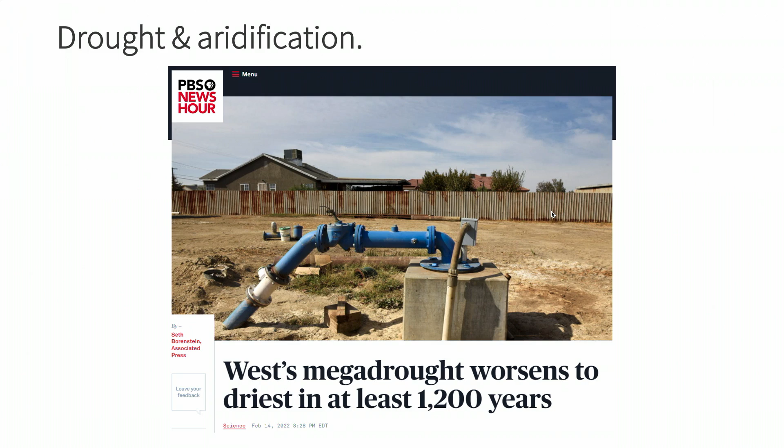This pretty severe period of drought is really exacerbating water levels throughout the Colorado River. And many of our communities in Colorado rely on Colorado River water, and we're seeing greater and greater tiers of cuts being issued by the Bureau of Reclamation as our reservoirs are shrinking to 25% of their total capacity.

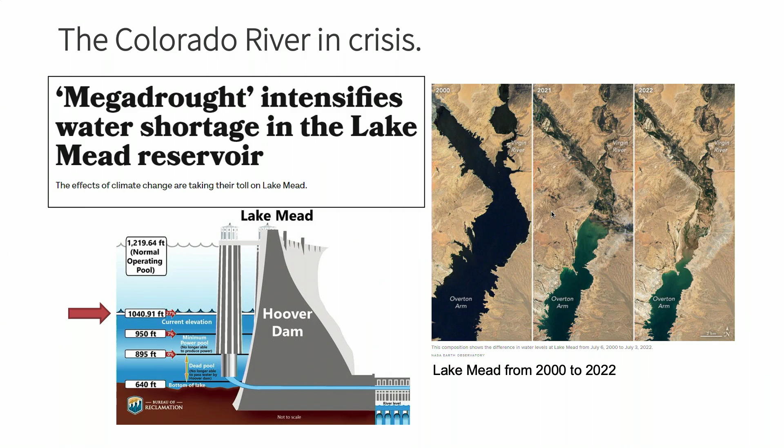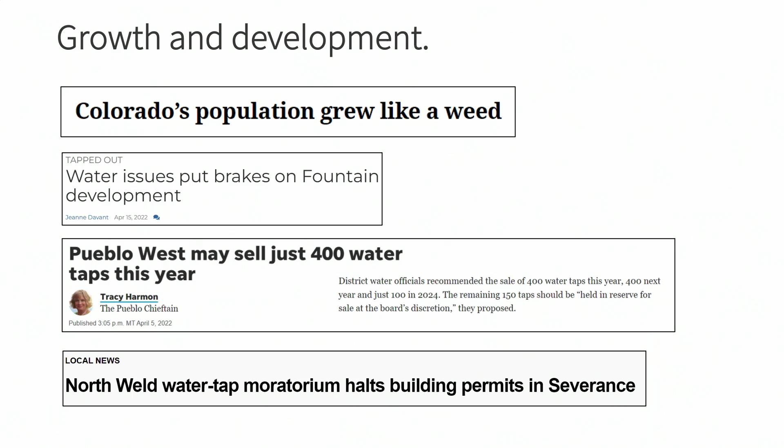At the same time, we are seeing that Colorado and other states in the West are growing. We know that this is creating additional pinches in our communities. We added almost 1 million new residents between 2010 and 2020, and we're projected to grow to 6.5 million people by 2030, which I just checked is less than 8 years from now. So this is happening quickly, and water is playing a major role in the way that our communities are developing.

The Colorado Water Conservation Board also confirmed that based on several different scenarios, we will be seeing a gap between the water supply that our municipalities have and the demand that's projected of between 250,000 up to 750,000 acre feet per year by 2030. So this is a growing gap.

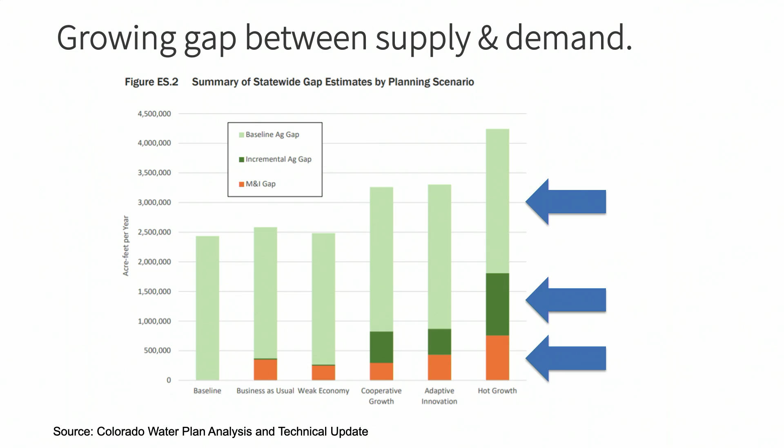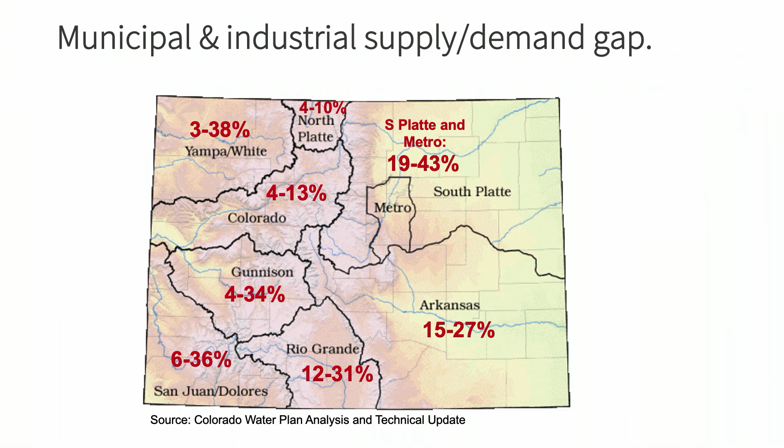And much of our, oh, sorry about these arrows here, much of our impact has to do with how we grow, whether we embrace adaptive approaches to our new development, or we grow with water in mind, or whether we kind of ignore that side of things and continue to move forward as usual. And the gap between water supply and demand projected exists in every basin in Colorado. So it's not a particular issue for a particular place. It's something that all of us as communities have to be considering.

So just quickly, Growing Water Smart is the program that I manage, and we empower local leaders to implement plans and policies that support community and regional water resilience. And the way that we focus our attention is by turning from the supply side of acquiring more water and addressing issues of stormwater by piping it as quickly away from our communities as possible, toward a view of demand side reductions, incorporating conservation, efficiency, and reuse into our developments. And also to really look at low impact development or green infrastructure as ways to work more in concert with nature and to infiltrate our stormwater rather than piping it away.

And we do that by involving many people in these conversations. It's not only the land use planners or the water resource managers, it's not only the developers or the consultants, it's not only the elected officials, but everyone talking with one another and coming up with the strategies and approaches that will make our communities more resilient to existing and future water issues. And our communities will benefit in more ways than one. That impacts cost of water, that impacts resilience to natural hazards like drought, wildfire, flooding, and it enhances our ecosystems to be more resilient in the future.

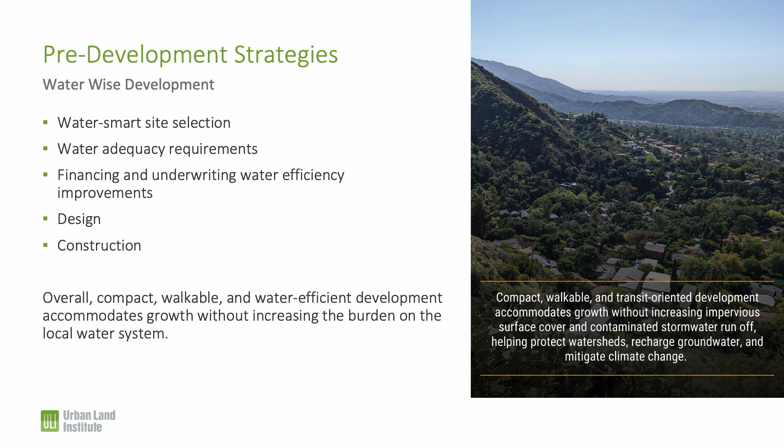Indoor water use in the U.S. has significantly decreased in the last two decades because of the increased efficiency of water fixtures and appliances, but there's still a long way to go. A lot of buildings still have those older fixtures in them. So don't ignore the existing properties. There's quite a bit of ground to make up. That will result in significant savings across development types.

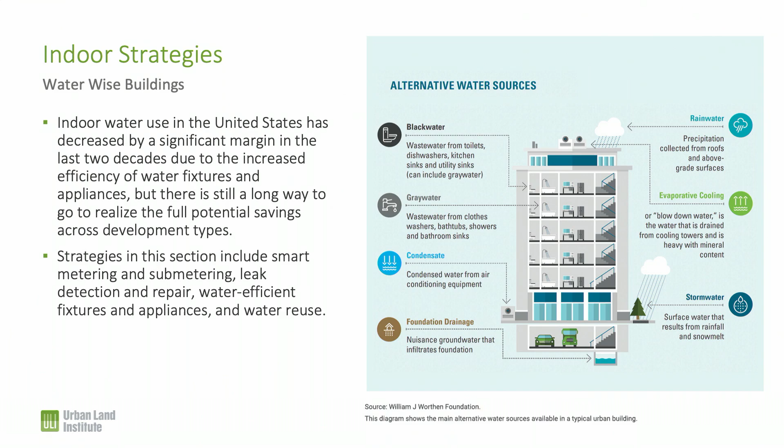Strategies in our indoor strategies section include smart metering and sub-metering, leak detection and repair, water efficient fixtures and appliances, and water reuse. And you can see on this chart that we have different water sources that are usually available in a typical urban building for water reuse. So that's really exciting.

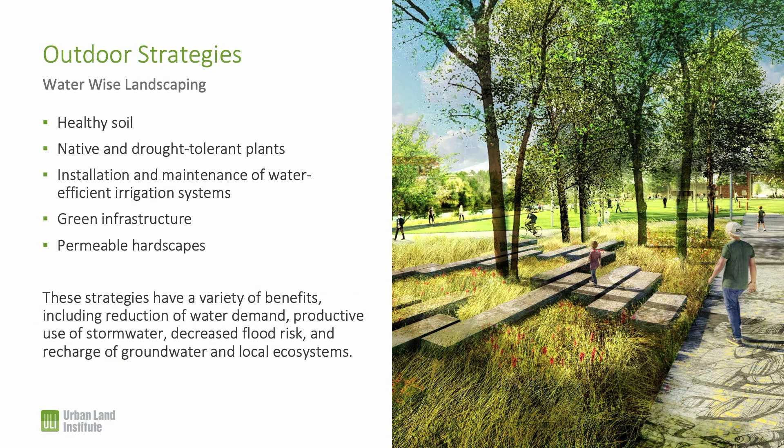Outdoor strategies, Bill will be digging into some of these after I talk, but they include everything from soil preparation to native and drought-tolerant plants, installation and maintenance of water-efficient irrigation systems, green infrastructure, and permeable hardscapes. And these have a variety of benefits, not only reducing water demand, but also productively using stormwater, decreasing flood risk, and recharging groundwater and local ecosystems, which is critical when you're in a drought situation.

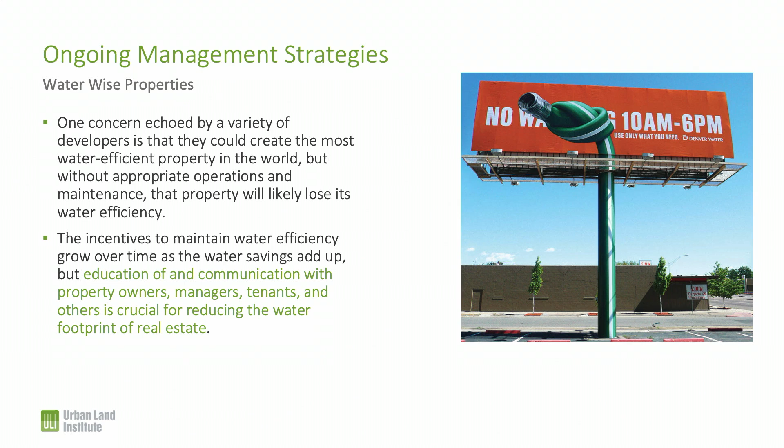And then in terms of ongoing management, one concern that we heard from many developers is that they could create the most water efficient property in the world, but without appropriate operations and maintenance, the property will lose its water efficiency over time. So we need to promote ongoing maintenance and operations for water efficiency. And the way we do that is through education and communication with property owners, managers, tenants, and others. And that's really the best way to reduce the water footprint of real estate over time.

We also looked at public sector policies and practices that can support responsible water use. If you were here during the last session, you heard some of these, but in this report, we really dig into what they are, why they work, and why the ones that are included in the report will probably get cross-sector support. But I'll just touch on them briefly here, and again, if you have questions about them, we're happy to talk about them later.

Water loss control is the fancy terminology for stopping leaks. Huge percentages of water are lost in our water distribution system, so that's something to look at. Regional water reuse, as opposed to just counting on developers to do it at the site scale. If you do it regionally, you get major economies of scale that you just can't get site by site.

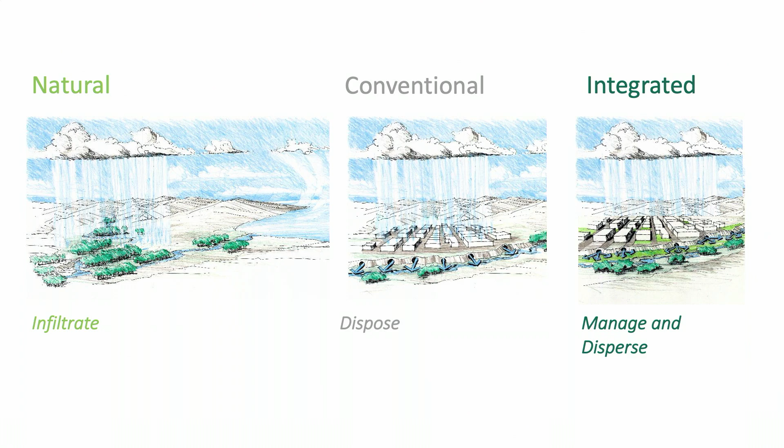So you store water integral with this urban fabric. You store it along and adjacent to the city. And in the process, you begin to heal the groundwater regime and the watershed itself. So that hybrid, I think, is the way we need to start to think about our engineered systems, urban stormwater systems. I can't go back. I won't even try that.

I'm going to show you a series of systems that are private, public, and then public-private, because I think the ultimate goal ought to be that the city works with private development to create the whole notion of one water, because I think that's one of the key ideas that come out of the Urban Land Institute's plan. This is Taxi in the city of Denver. The colored building there, a very old image, is of what is now a campus of mixed-use mid-rise buildings in the old industrial area of the city.

This is a diagram of the surface stormwater system on the campus today, so the different colors of green essentially are both site landscape, about 10% of the site, and most of you, if you're a city planner, mandate you've got to have 10% landscape. Well, stormwater takes about an equal amount of space on a site. So when you integrate the two, you end up with what we call a multifunctional system of stormwater landscapes that just permeate and create the site plan.

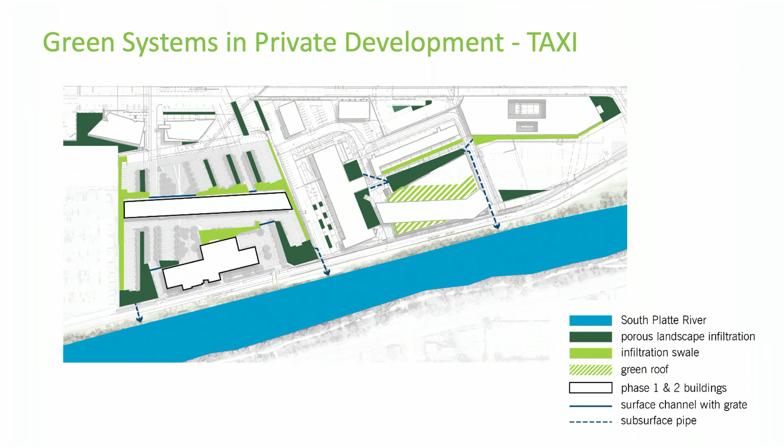This is totally surface parked. It's a mid-rise, medium-density, mixed-use development. Okay? It has just one piece of subsurface stormwater piping. The rest is surface. And these are images of the first phase that has matured quite a bit. As planners, you're going to have to involve your city engineers because the standards need to change slightly. This grate here replaces subsurface piping.

The site has very little, if any, curb and gutter. A lot of soft materials here. The walkways are actually integral with the drives. You know, it's now called a complete street. This is 20 years old. So that notion of these multi-purpose, multifunctional systems within a site, I think, is basic to how we try to think about everything we do in the office.

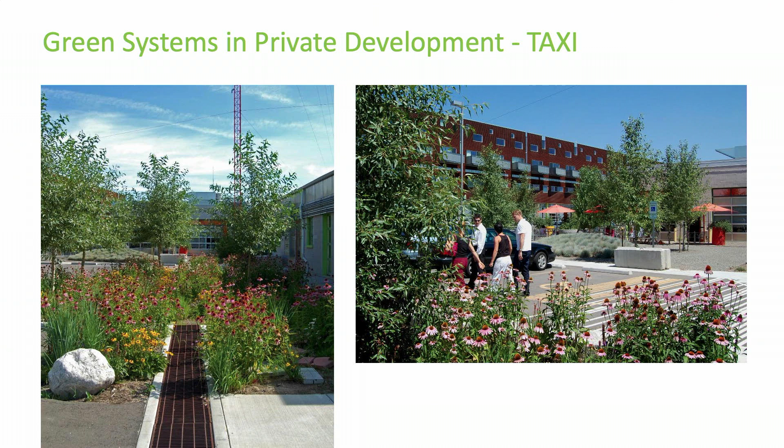What it does then is open up more land for development. Remember that 10% of each site that has to go for stormwater management? Nope, now it's in the park. So the parks, the civic landscapes, become integral to the function and the development potential of the private. That sort of public-private collaboration on developments this large is actually pretty easy because there's typically about 25% open space on planned communities like that.

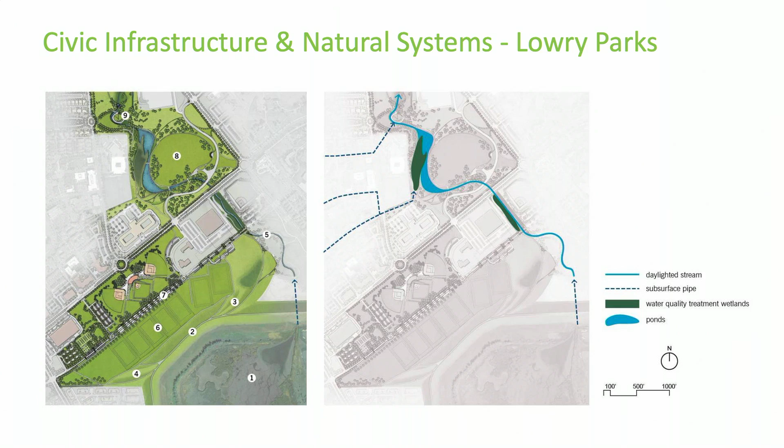Quite easy. The key, I think, is that you look at parks differently, that you have just enough bluegrass to meet those sorts of public needs, in this case for a taekwondo class that adopted this terminus of 6th Avenue. So they come there and they have their practice. The rest of it, at least 50%, and this is a major community park on the site, is native or adaptive low water use plants.

You can see Westerly Creek here in the foreground. Also, these large flood control dams. This dam is about 50 feet high. It's created one of the largest wetlands in Denver. We had mountains of rubble stored on site from demolition of the runways that we had to do away with. So we used them to create universally accessible ramps to the top of the dam, creating one of the most popular walkways in the community.

So we solved a problem at reduced cost and made infrastructure multifunctional and an asset and amenity to the community. Again, no one thing should serve a sole purpose, and it should add value to the community, in my mind. And this is a view of Westerly Creek and a small pond.

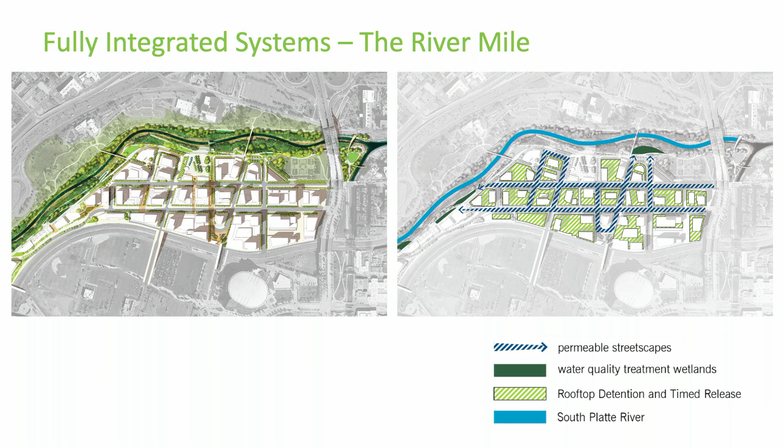I think that's it. No, a couple more. I forgot to mention the streets. They are complete streets, multimodal, with stormwater function in the landscape areas. Let's see what else, and the river itself. A series of riparian terraces so that you get stormwater storage and really do start to restore the river as a functioning natural system. With that, I think I'll turn it over to Brock.

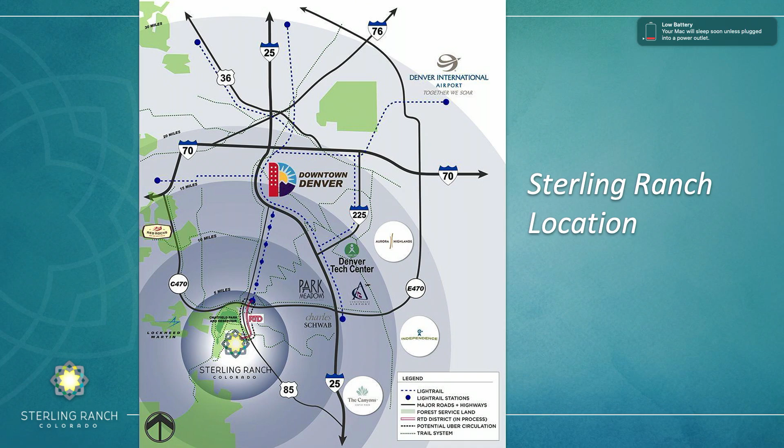So I'm president of our development company. I also sit on the Water and Sewer Board for a district that was a developer-initiated district that built the entire water wastewater system for Sterling Ranch. So Sterling Ranch is located in Douglas County, right next to Chatfield Reservoir, about 15 miles to southwest of the Denver Metro.

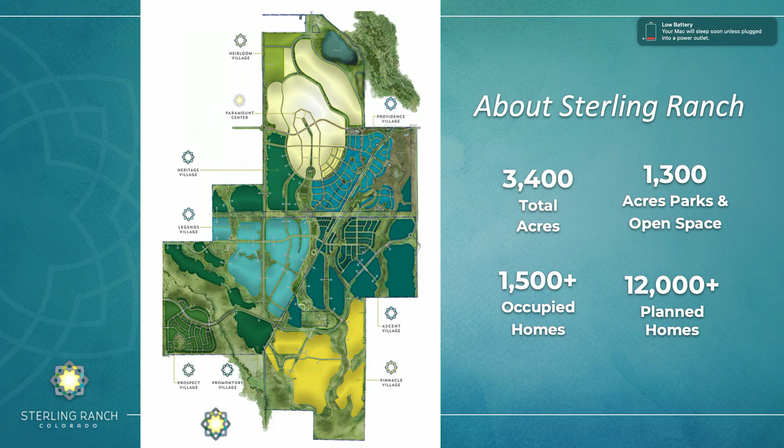It's 3,400 acres, zoned for 12,050 units. About a third will be open space. As of the end of this month, we have 1,500 occupied homes, so it's certainly in its infancy, but we've sold over 3,000 lots to home builders and multifamily developers, so we're about a third of the way through.

So as far as water, land, and return on investment, there's Colorado's 80-20 rule, which is 80% of the water is west of the Continental Divide, where there's 20% of the population, and 20% of the water on the east side of the Continental Divide, where there's 80% of the population. So water is extremely important for growth in the Front Range.

This map is a map of Douglas County. It's a county of 372,000 people. It was developed almost entirely on aquifer water. So they've been using a finite resource to grow that entire population base, and now those districts are converting to renewable water.

For Sterling Ranch and for Dominion, we had to commit in order to get our zoning through Douglas County to be a minimum of 70% renewable at full build-out. It will most likely be between 70 and 90%, and we've been able to use groundwater as a resiliency tactic for drought management, as well as aquifer storage and recovery. So it's a little unique, and a combined renewable groundwater system is a conjunctive use system.

What's a little unique is that groundwater is about a factor of 10 less expensive than surface water, both in the water rights acquisition and in the infrastructure to deliver it. And so what we're seeing is Castle Rock and Parker, Centennial, which is Highlands Ranch, as well as Castle Pines, they're all having to do this conversion. And we started with our tap fees being at the highest end of the Douglas County region, and we've slowly watched those districts come up to be in line with us.

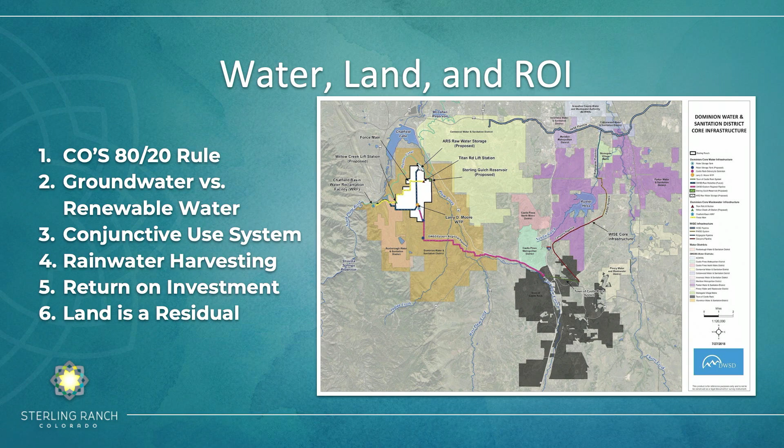But as far as aligned incentives of land development and water conservation, the land for a land developer like ourselves is a residual of the purchase price of the house. So the higher the tap fee, the lower the land residual to the land seller. And so we've intentionally been very conscientious about how we could reduce the amount of water we have to provide, make a very resilient system so that we're not relying on any given source, but offer the lowest cost to our customers as possible.

We use water to extinction, so we will actually be building a wastewater treatment plant and using effluent in our system. We're also the first and the state's only rainwater harvesting municipal system. We'll actually be adjudicating a rainwater right, the first one in the state, between 2022 and 2026. We expect that that's about 500 acre-feet. With our demands, that would be, I believe, enough for about 1,500 homes worth of water.

So the tools that we've used to be water-wise are the land plan design, kind of in Bill's area of expertise, a diversity of housing that is becoming more prevalent in the suburbs, landscape and lot design, technology, and an effective rate structure.

So in talking about success, our average consumption per residential unit is 0.17 acre-feet. The average in the metro area is about 0.4, so it's less than 50%. That's about 55,000 gallons per home, 45% lower than the average MSA, and that's actually 26% lower than what the CWCB's state water plan called for by 2050. And we've been able to accomplish that predominantly with a variety of housing.

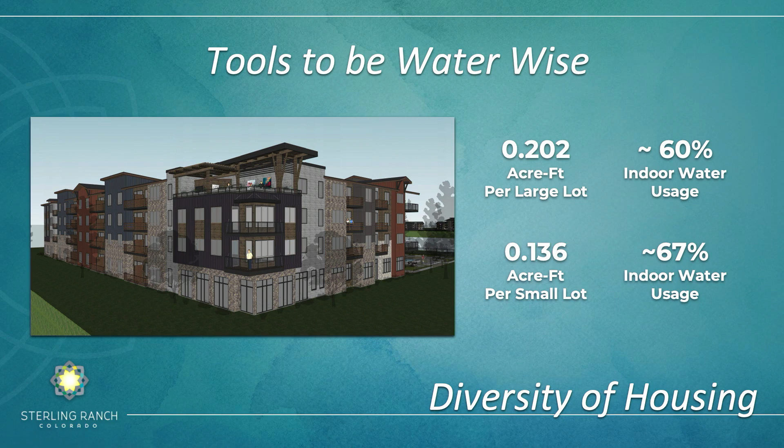On landscape, we worked with Bill as well as the Denver Botanic Gardens back in the day and the CWCB to come up with different landscape palettes for the entire master plan. There's quite a bit of homeowner education to educate them on how to design their landscape palettes for their front and backyards. Every landscape plan comes into a design review committee for review and approval. Those landscape plans have irrigation budgets based on the lot size.

There is no one size fits all. There are a lot of municipalities in Denver that are banning grass altogether. My personal perspective, not always shared even among our team, is that grass is not always the enemy. I think it makes sense in limited applications. We're not Arizona, we're not New Mexico, we're not completely a desert. And so having limited, tasteful applications of it breaks up some of the landscaping and differentiates Colorado from the desert climates.

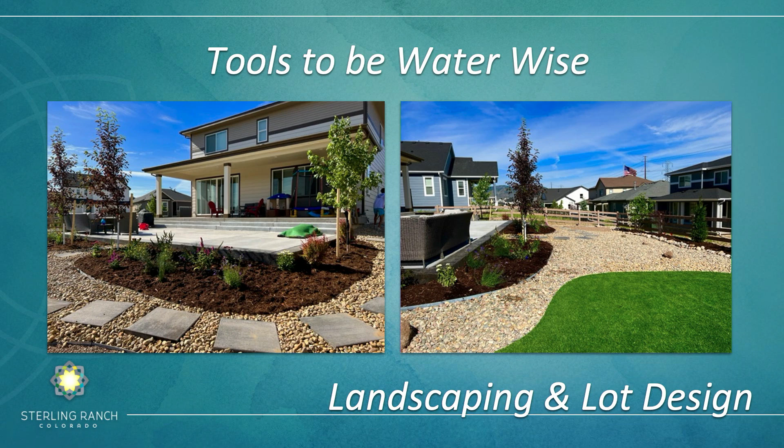These are some other examples, so you can see we do have grass in backyards. We have not banned them, like Castle Rock and Aurora, which have now banned grass in backyards pretty much altogether.

Technology has also certainly enabled us to achieve these water reductions. We do have dual water meters that are read in 15-minute intervals. That allows us to appropriately bill what homeowners are using indoor versus outdoor. Since outdoor water usage is a system loss, we're not able to reuse it. It has a significantly higher rate, and I'll point that out on the next slide.

We also use Rachio, which is a Colorado-based company that had a large investment from Amazon, that does predictive irrigation cycles based on weather. It ties into a nearby weather station, and we have graphs that show it's been able to correlate outdoor irrigation almost perfectly with temperature.

We also have a partnership with a company called Copper Labs that provides homeowners in near real time their water consumption, as well as electric and gas, and it allows predictive analytics that tell you what your bill will be at the end of the month based on current consumption patterns. And before the state required it, we have required low flow fixtures in all of our houses since 2015.

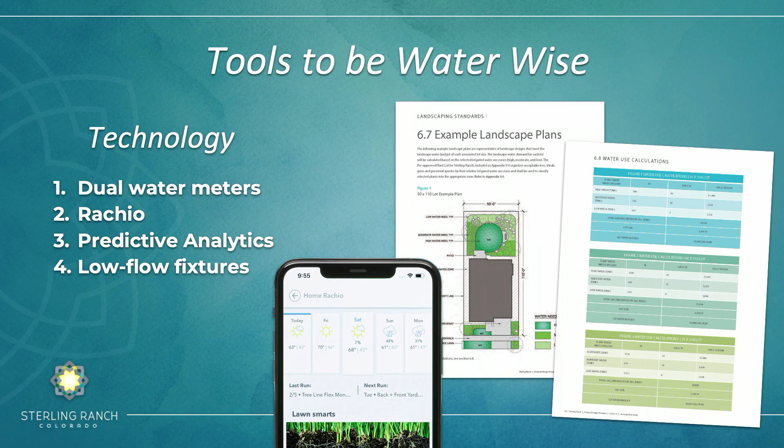When a homeowner comes in, buys a house, typically the home builder installs the front yard landscaping. The backyard landscaping is on the homeowner to install typically. They will present a landscape plan based on their lot size. They can come up with what their water budget is, and then we have 2 landscape architects who look to make sure that conceptually that plan will come within its budget.

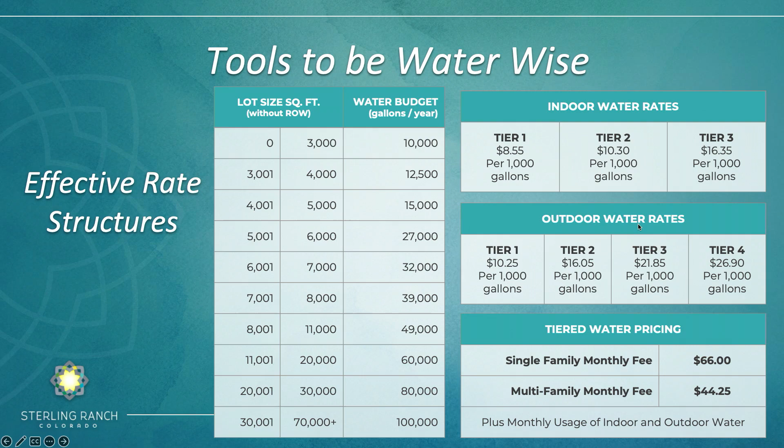And then on the rate side, we have tiers. If you come in under 80% of your water budget, you are in tier 1. If you're 80 to 100%, you're tier 2. And then if you go substantially over, you hit into these other tiers. And you'll notice that on the outdoor rates, it actually doubles from tier 1 to tier 3, and it's almost triple by tier 4.

So ultimately, we found that WaterWise works. We've seen resiliency in our system. We've also seen the market adjust to the real cost of water in Colorado. And ultimately, I'll end with there's aligned incentives between developers and water conservation, going back to that land is a residual of purchase price. To the extent you can lower the cost of delivery of water, it ultimately drops to our bottom line. So it's ultimately been a very successful project, and we look forward to continuing it through build-out.